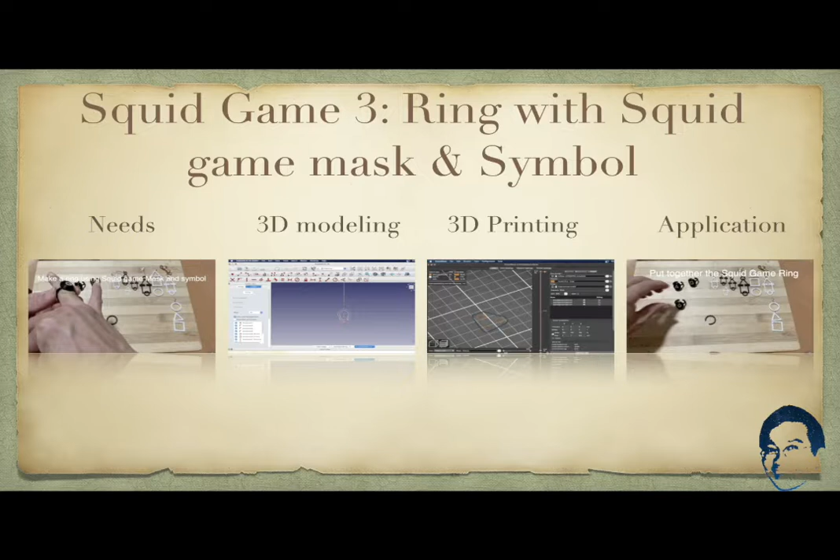In this video, I'm going to show you how you can easily create a wearing ring using the Squid Game mask and symbol. Let's see how the Squid Game ring looks on your fingers.

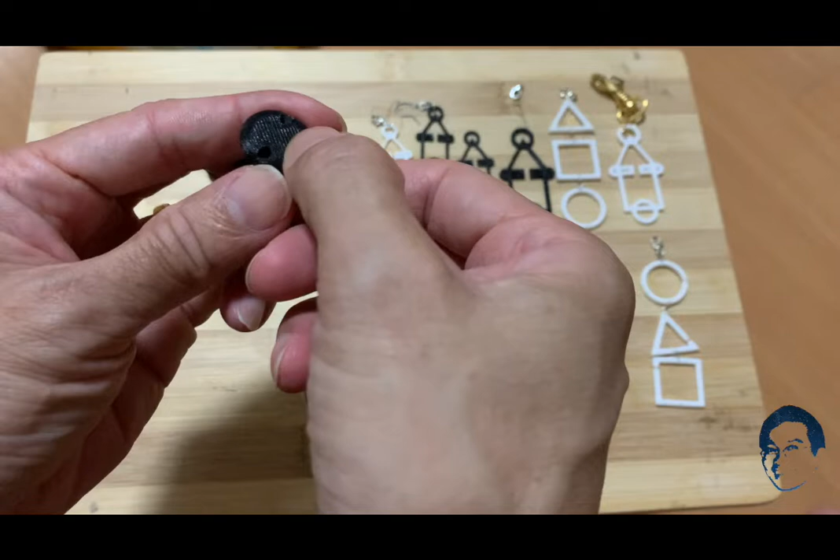These are the printed parts. The 3D printer textured bed has created a very nice texture on it. Behind the mask part are the holes we make for the ring to go through. This is a completed ring with a mask shape ring and the symbol of a circle, square or triangle.

To put the ring and the mask part together, align one end of the ring to the hole behind the mask, insert the ring and turn it around till it is aligned properly. When done, put it onto your finger. It looks nice and unique, right?

If you have a different finger size, you can print the ring with a different size too. For this one, we modeled the ring with a 10 mm radius, taking away the thickness of the ring. The diameter of this ring is about 18 mm.

You may have noticed there are Squid Game accessories here that are different from the rings we have made in this video. They are created in our earlier videos. If you are interested in them, please watch the video. The URL is provided in the description below.

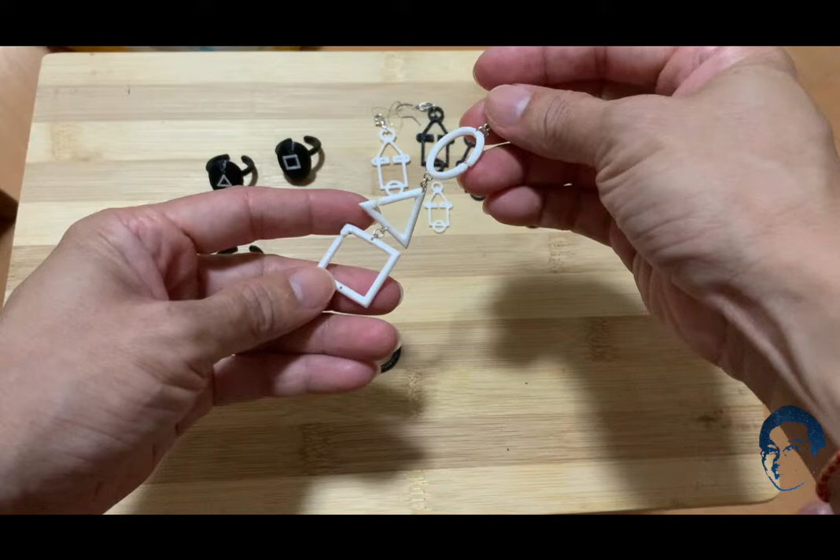This accessory is created in Squid Game Video 1 using the Squid Game symbols triangle, circle and square for earrings and hanging accessory. The other is the Squid Game symbol made in Video 2, which we made into a keychain, earrings and hanging accessory. Alright, which Squid Game mask ring do you like?

Is it the one with the circle, square or triangle? Do you like this mask wearing ring we have made? Do you want to design and make it yourself?

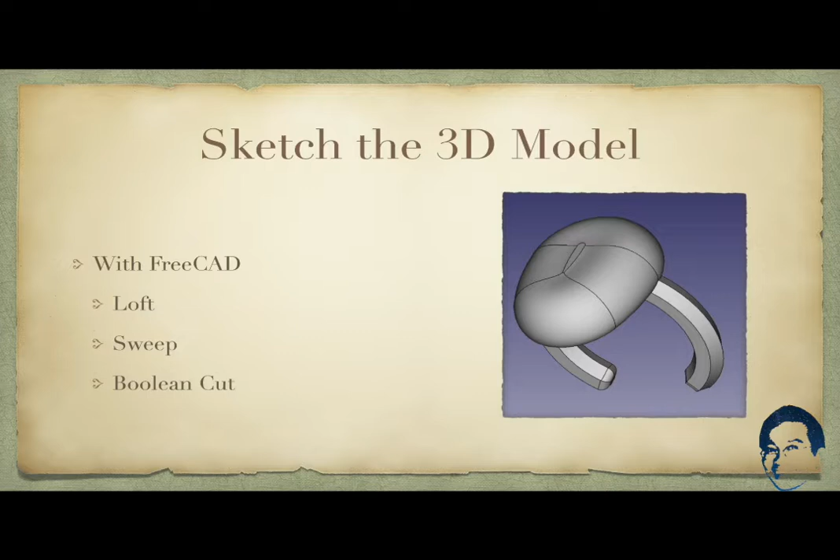Now I'm going to show you how to model the accessory with the FreeCAD software. This is the face mask of the Squid Game mask shape that we are going to create in FreeCAD.

If you do not have a copy of FreeCAD, you can go to freecadweb.org. There are installers for Windows, Mac and Linux. In FreeCAD, start a new document.

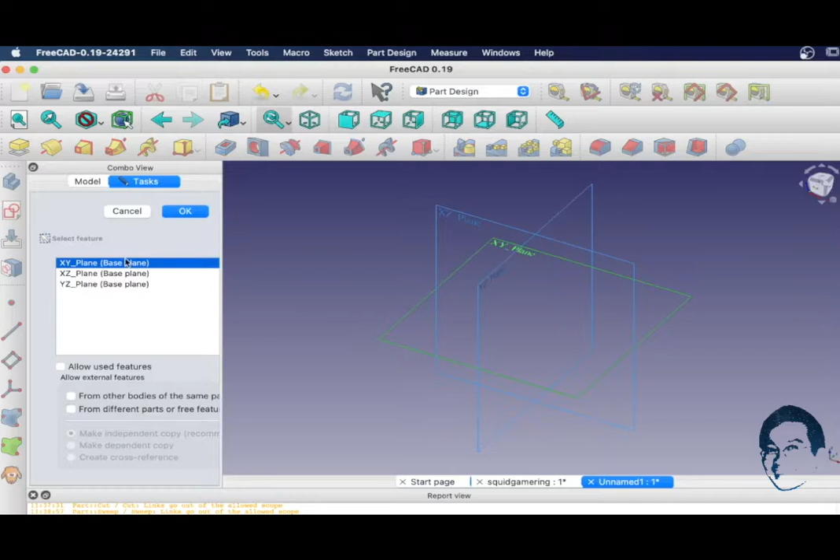In Part Design Workbench, create a new body and a new sketch. In the XY plane, select the arc tool here and we're going to draw an arc here, constrain it to the origin and create an arc, followed by another arc below here, then we constrain to the y-axis.

The radius for the upper arc is 5.5 mm and the lower arc we're going to set the radius to 4.5 mm. We want to make sure that the top is constrained to the axis here, so by clicking the point and the axis, make sure they are constrained to the axis.

The distance between these two arc centers is 5.5 mm and the angle for the lower arc we will set to 130 degrees. We want to make sure the arc is aligned horizontally, so you select these two end points of the arc and set the vertical distance to 0.

Next, we're going to connect the arc on the left side of these 2 points here, constrain it, and the other one, and do it here, and likewise go to the arc on the right here. We will set the radius for the arc to 18.9 and set the right arc equal to the left arc. Alright, this is fully constrained and this is the first face shape we're going to create.

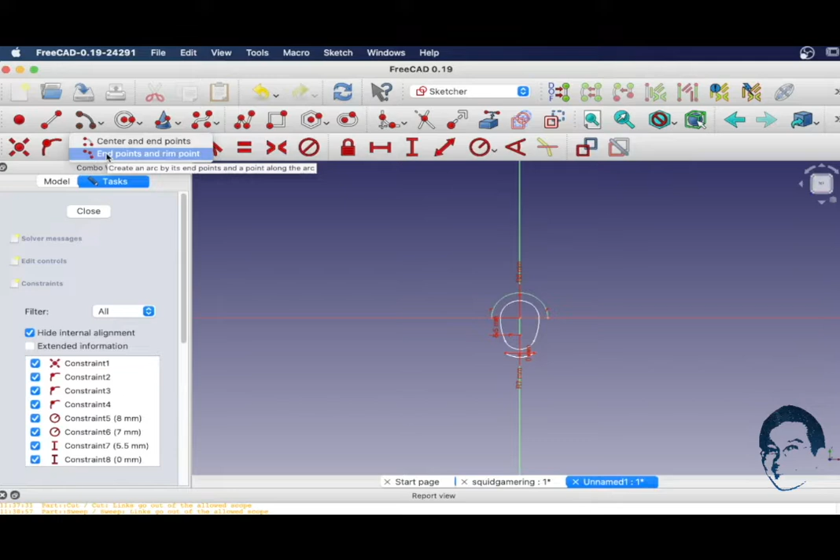Likewise, we will make sure that these 2 points are aligned horizontally by setting the distance to 0. And again, we will use the endpoint arc tool and connect these 2 points on the left here.

Okay, likewise go to the right, connecting the 2 points together, and let's set the angle for the lower arc, which is 130 degrees. Alright, so now we can set the radius for this arc again and set to 18.9, and let's make these two arcs the same, equal. Alright, fully constrained. We are good with that.

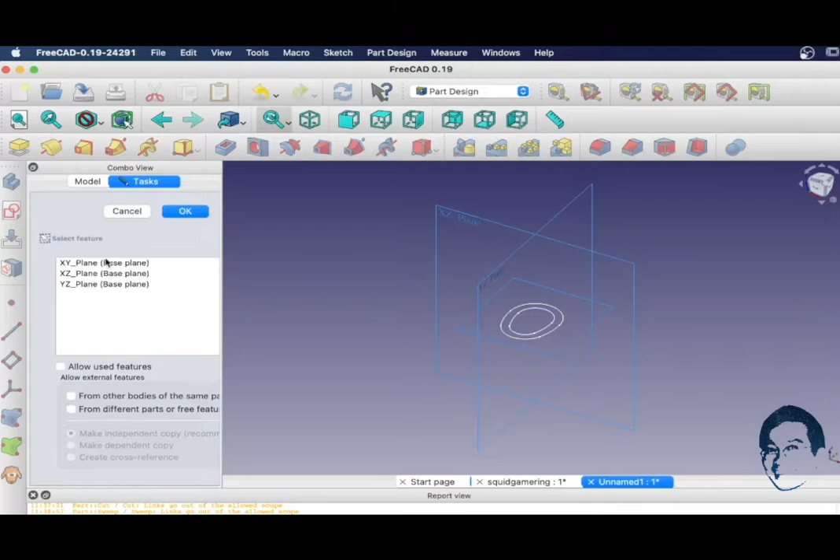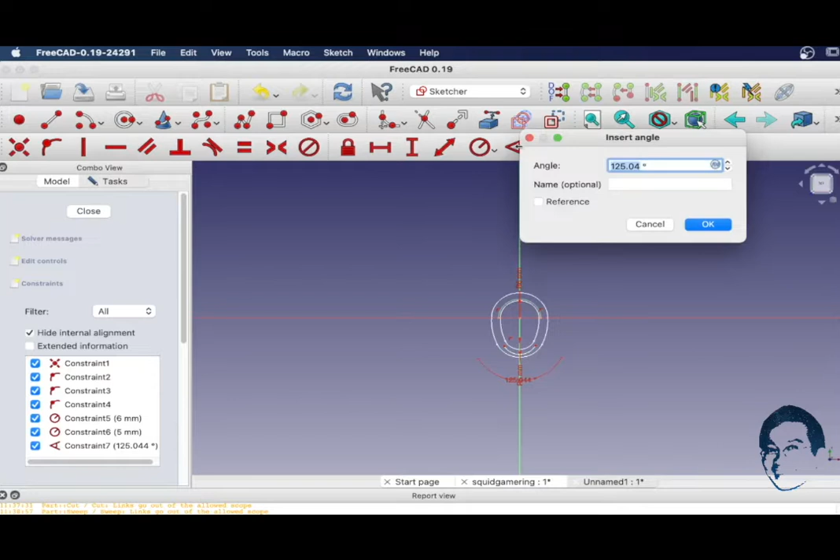Right, let's create another sketch in the XY plane. Draw the same arc again using the center and end point starting from the origin, and we're going to draw an arc here, constrain to the axis. Likewise, another arc below here, and set the radius to 6 and the lower radius to 5. Set the angle to 130 degrees for the lower arc, and make sure that the 2 points for the lower arc is constrained to 0.

And connect the 2 points on the left here together. Likewise, go to the right end point here, constrain it together. Now we'll set this arc radius to 18.9, and again we'll set these two arcs equal, and the last point is to set the distance between the two arc centers to 5.5. Okay, we are good with this.

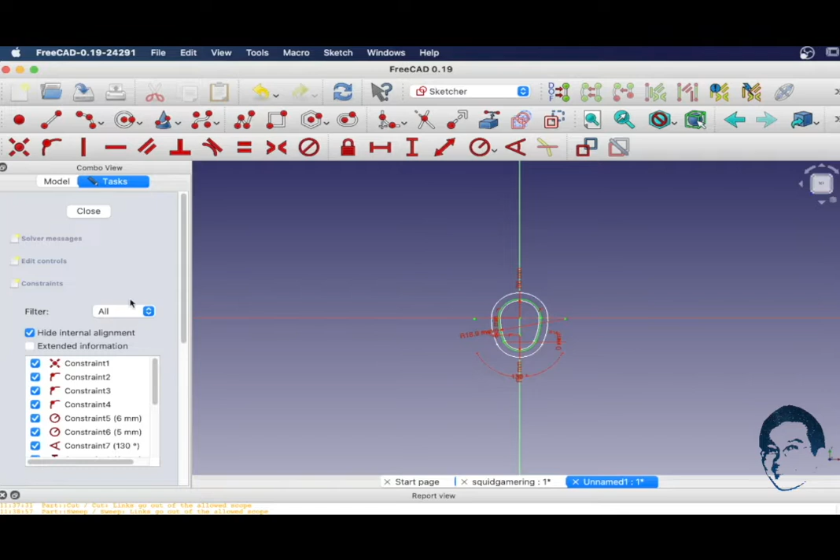Okay, now we have created 3 sketches, but they need to be at different distances on the Z axis. The first sketch, we will move it 2 mm below. So let's go to the attachment here, position. Under the Z, we'll move it -2. So you can see that now the sketch is moved downward.

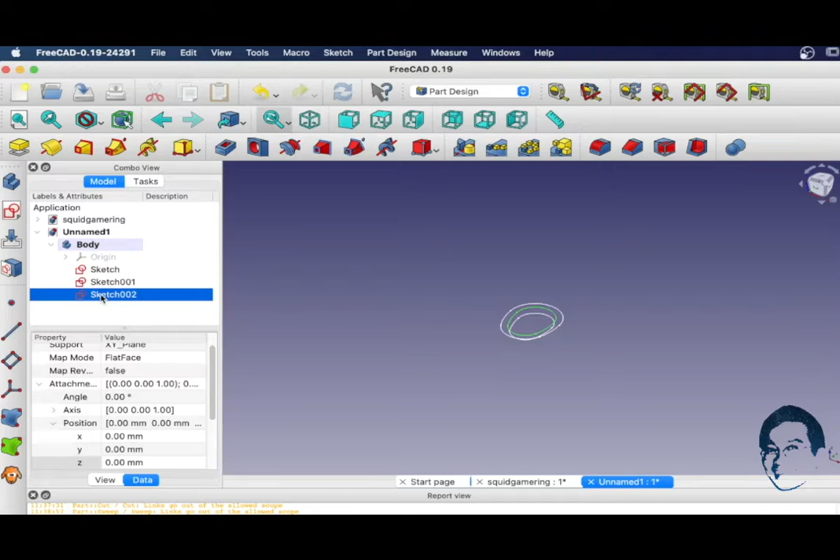For the sketch 001, we'll keep it at the current position. As for sketch 002, we'll move it up by 4.5 mm. Okay, so this is how it looks, on the sketch itself. Right, good. And we need to create 2 more sketches on top of this one.

Alright, let's create a new sketch again, and likewise on the XY plane, we're going to create another sketch using again the arc tools here. Constrain again, and we're going to draw a smaller arc here, and likewise below another arc here. Right, the radius for the upper arc is 2.5 mm. The radius for the lower arc is 1.5 mm. Right, let's zoom out a bit so they can see them.

Let's set the angle for the lower arc first to 130. Then we can set the 2 endpoints of the lower arc to make sure that they are aligned horizontally to 0. And again, use the endpoint arc tools and create the 2 arcs on the left and the right here. The radius for this arc is 18.9. Make both sides the same by selecting them and using the equal tools, and the distance between the 2 arcs here is 5.5.

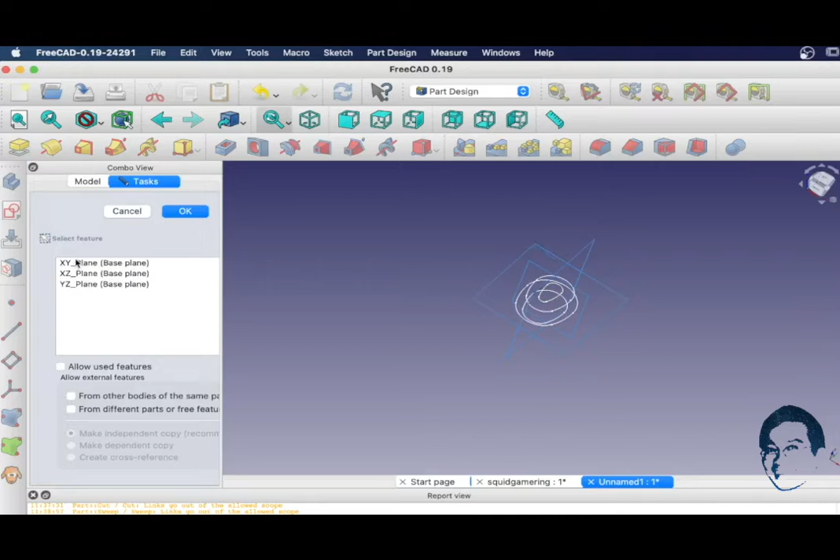Close it, and now for this one, we're going to move this up to 5.1 mm. So you can see on the side here, that's how it looks like. Alright, we're going to create one more sketch. Okay, let's do it. XY plane again. This one, we're going to create a small sketch.

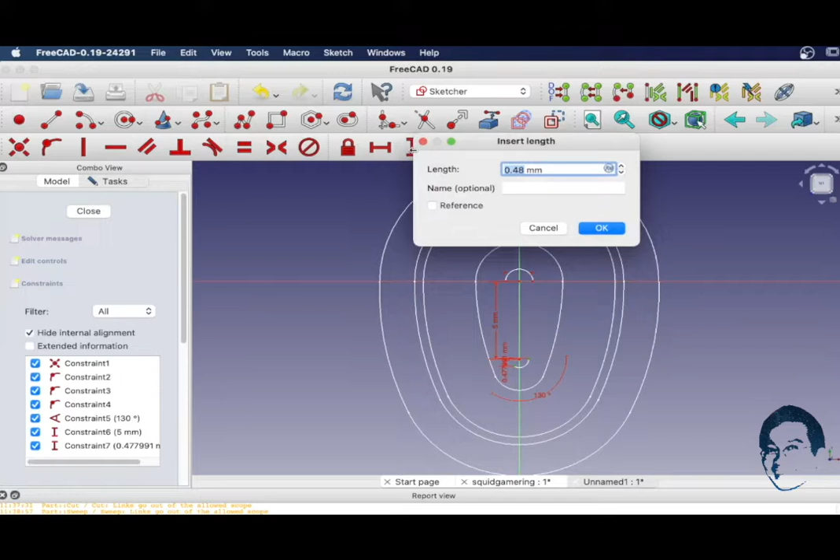Constrain to center, get an arc, constrain, and another arc here, constrain, the angle for the lower arc is 130 degrees. The distance between this lower arc center and the upper arc is 5 mm. Likewise, constrain the lower arc endpoint to 0. Finally, again, use the endpoint arc to draw the side arc. Okay, let's draw it. And the radius for the arc is 18.9.

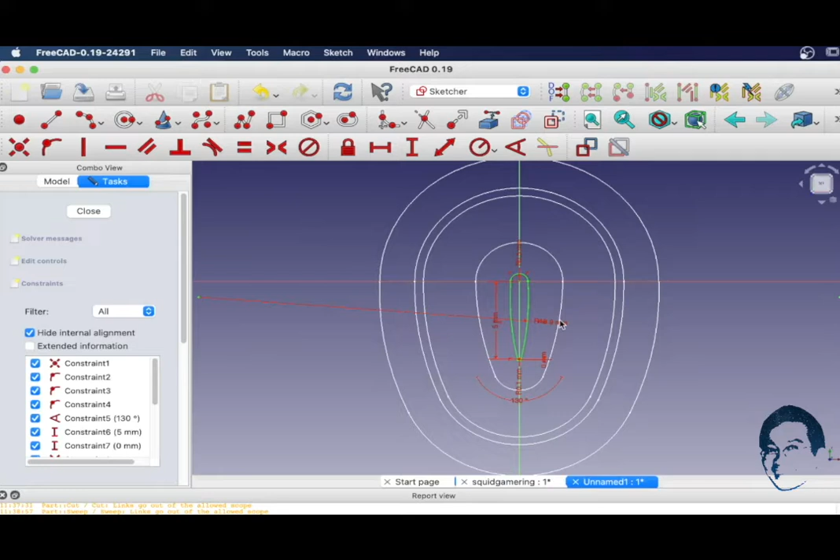Okay, the upper arc radius is 0.5 and the lower arc radius is 0.1. And now I can set both equal. Okay, so this is how it looks. On this sketch, I move it up to 5.15. Okay, so this is how it looks.

Okay, we need to select the first sketches here and create the loft tools, and then we start to add the second layer. Okay, we add this, click on this, followed by this. This is how it looks in terms of the shape that we want to create.

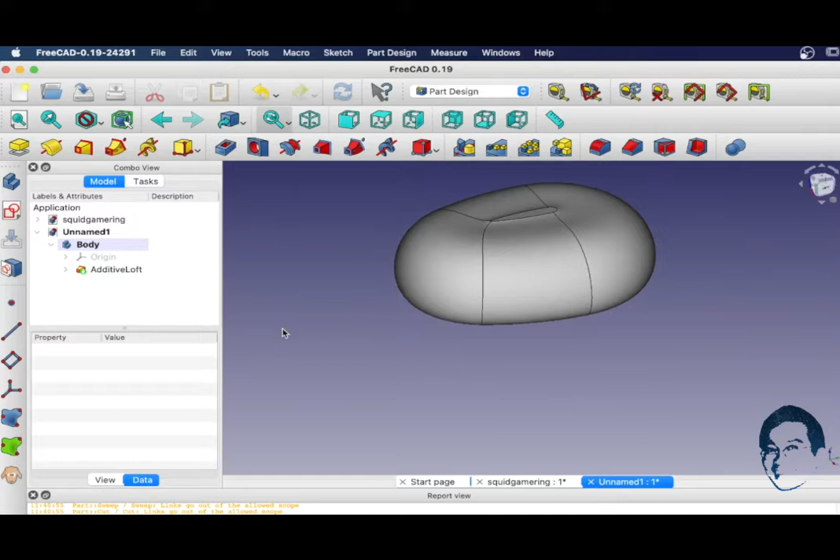Right, so if you now look at the earlier one that we have, we actually create a hole here for the ring to go through. So the next thing we're going to do is add the ring hole for this. Right, for that we're going to create two more sketches.

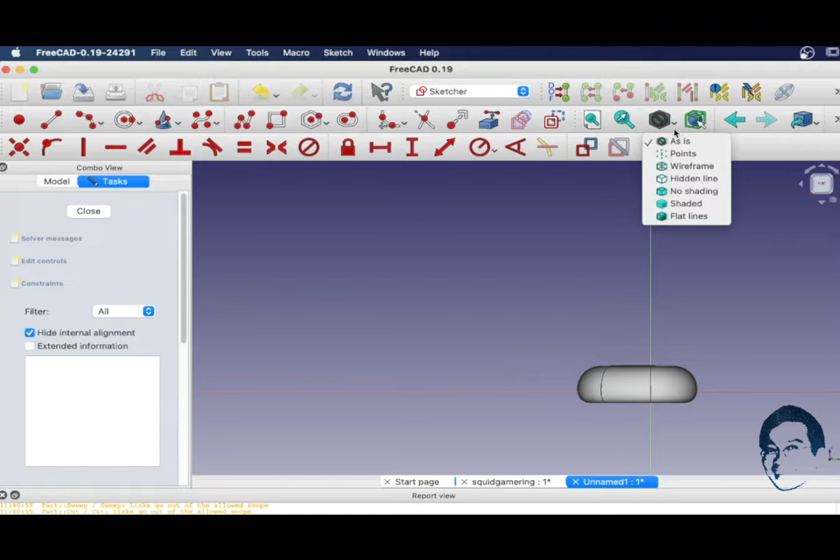Create a sketch on the YZ plane. We're going to draw a hexagon here, and as the object is blocking us, let's change it to wireframe. Use the hexagon tool and draw a hexagon here. Alright, so that's the hexagon we have.

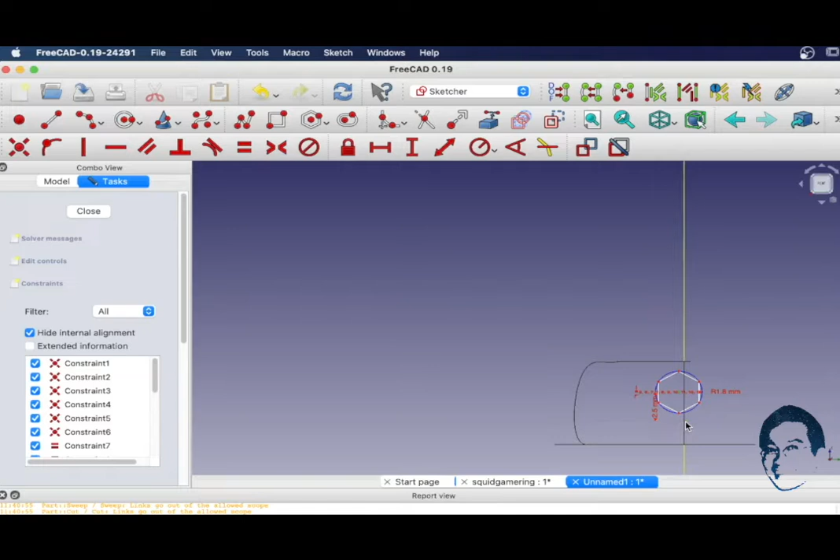Select the line here and set it vertically constrained. The radius we'll set to 1.8 mm. The distance between this and the origin, the vertical distance, is 2.5 mm. We're going to constrain this to the y-axis as well. Let's set the distance to 0. So this is how it looks like.

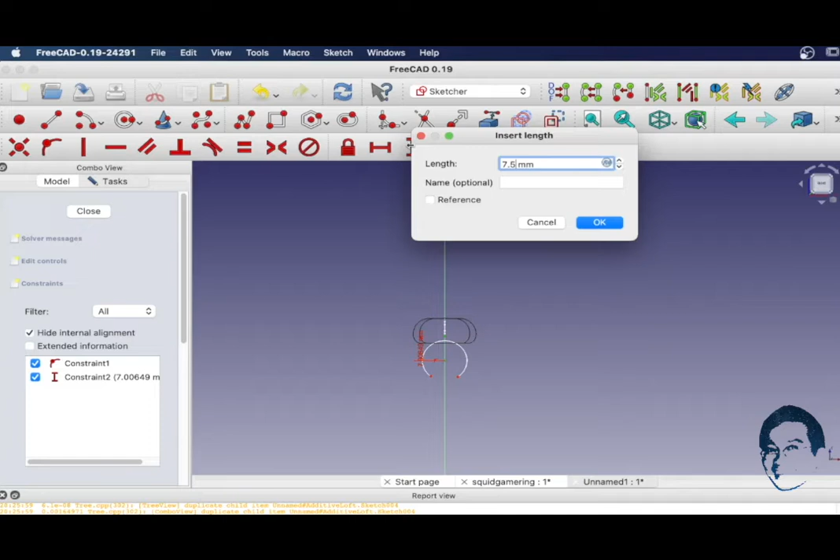Now we're going to create one more sketch for the ring. Create a new sketch on the XZ plane and draw an arc. Constrain the arc center to the y-axis, draw the arc from here to here. The distance between this arc center and the origin, the vertical distance, is 7.5 mm, and the radius for this arc is 10 mm. Basically, this is all we need to do on this arc. Close it, and go back to the view, show it as is.

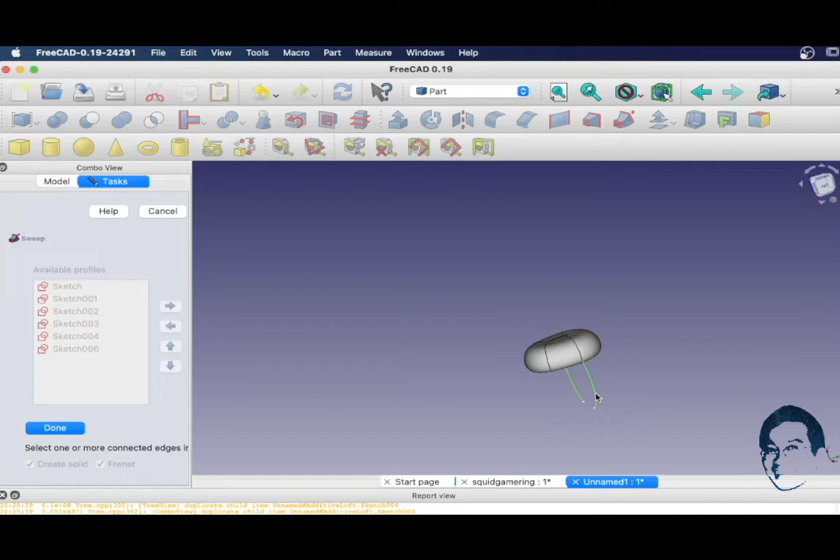Next, switch to the Part workbench. In the Part workbench, select the sweep utility. Select item 005, select create solid and Frenet. We're going to select the sweep path, which is the ring. Done. Okay, so now you can see that I have created a ring around it, right?

And the final thing we need to do on this is a cut between this item and the sweep, followed by a cut. Right, so that's how this thing looks like, and we are done with this.

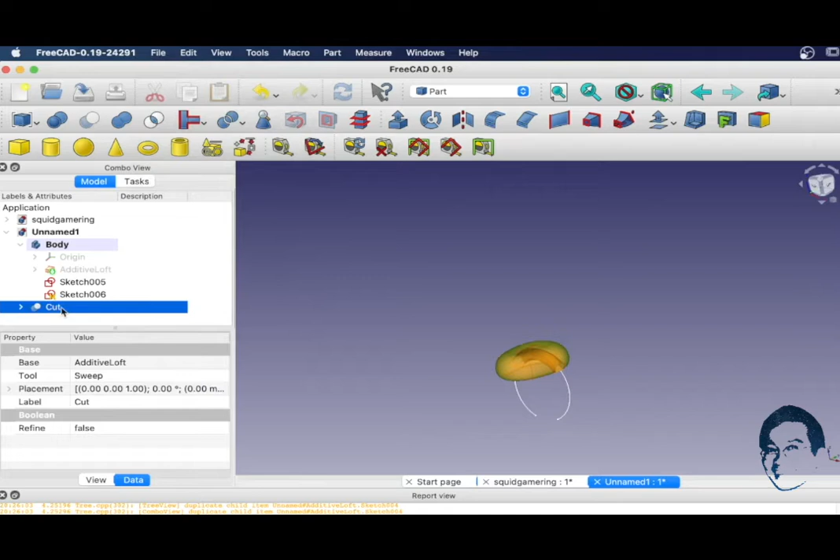And you can save it and export this for your slicers to slice for printing. So from here, select the final object, which is the cut item, export from file, and export it to Squid Game ring. Save it.

Remember, we actually want to put a symbol on the face of the ring here, which is the triangle, square, and circle. We need to create 3 more models here.

Alright, so next is to create a new document. Go back to Part Design, create a new body, a new sketch on the XY plane. Let's create the circle first. Take the circle tool, constrain to the origin, draw 2 circles. The first circle, the radius will be 3.5 mm. The second circle, the radius is 2.5 mm. Fully constrained, we close it.

For the sketch itself, we'll pad it up to 0.3 mm, and that's all we need to do for this. We can export this out by selecting the pad item here and exporting it to Squid Game ring circle.

Export it out. Next, we create another symbol item for the square. Create a new document, new body, new sketch. In the XY plane, take the square tool and draw the square, 2 squares here. The width of the square is 7 mm. Alright, and the width and height are the same, so make them equal.

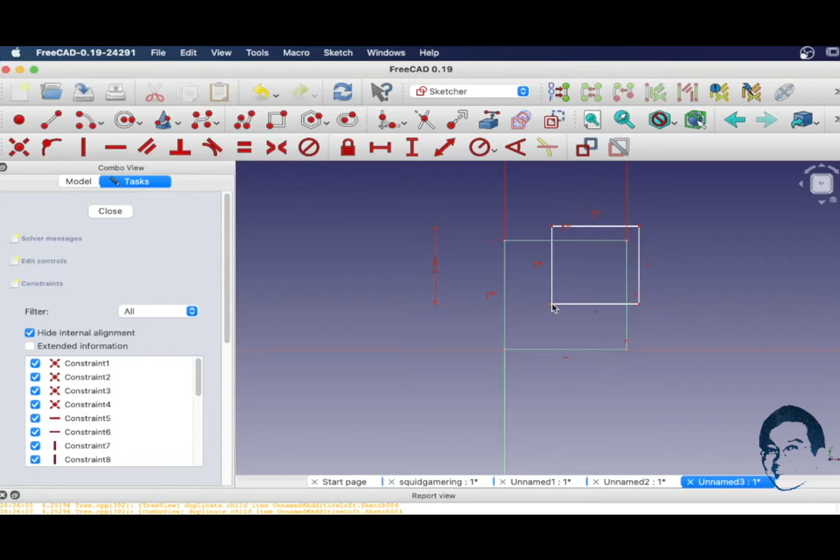Do the same for the other square. The height is 5 mm, and make the height and width the same for the smaller square as well, making them equal. Let's zoom it up. The distance between this and the origin point, the horizontal distance, is 1 mm, and the vertical distance is also 1 mm. Close the sketch.

Likewise for this one, we will pad up to 0.3 mm. Select the final object and export it to Squid Game Square.

Save it. Finally, we need one more document, new body, new sketch on the XY plane, using the line tool. Draw the angled line up, followed by another horizontal line along the axis, then another angled line up. So this is not constrained, as you can see. Make sure that they are constrained together.

The length of the side of the triangle is 7 mm. We make all the sides the same by selecting them and making them equal. To move this, select this and constrain them.

Now draw the inner triangle. Draw the angled line down, followed by another horizontal line along the axis, then another angled line up. The distance between these 2 points is 1 mm. The side distance is 5 mm. Okay, so this is how it looks like.

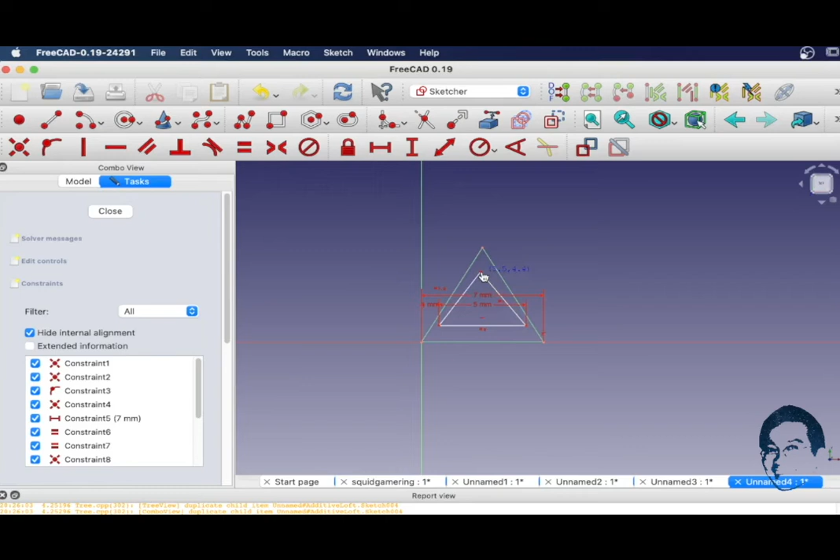And let's make all the sides of the triangle the same. And we expect the vertical distance here is 0.5, and we are good with that. Okay, and with that again we pad it up to 0.3 mm, and the final object we export it out to Squid Game ring triangle.

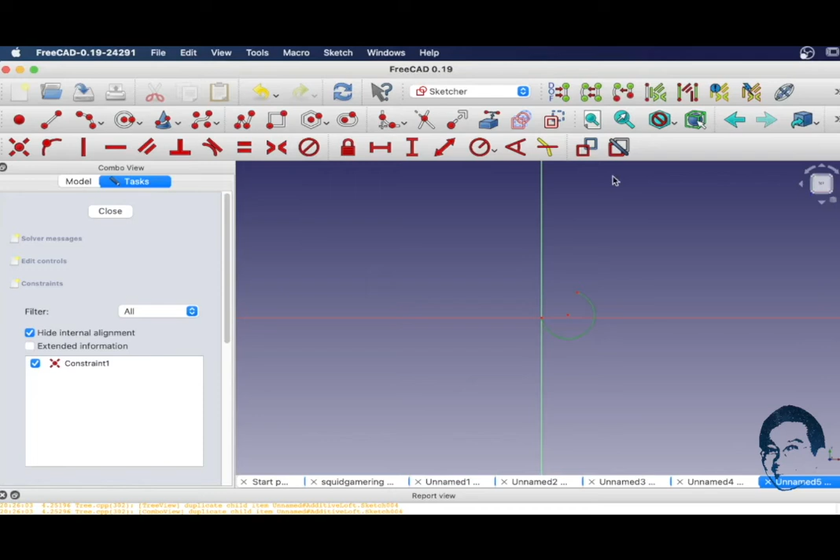Next, create a ring part for the finger. Create a new document, new body, new sketch. Right, so on the XY plane, use the endpoint arc to constrain to the origin and draw an arc around it. The radius for this arc, we're going to set it to 10 mm. The distance between these two endpoints of the arc here, let's set it to 6 mm.

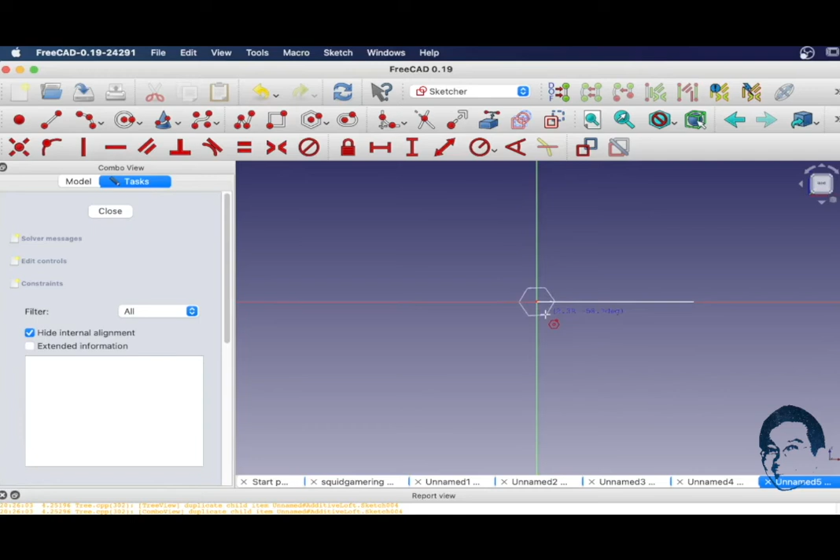Make sure that it's aligned to the axis here. Alright, so that's constrained to the axis to make it fully constrained. Good with that. Next, we need to create the thickness of the ring. Create a new sketch, XZ plane. Going to add a hexagon to this, constrain to the center here, add a hexagon. Make sure that the horizontal line here is horizontally constrained, and the radius for the hexagon is 1.5 mm. Good with that.

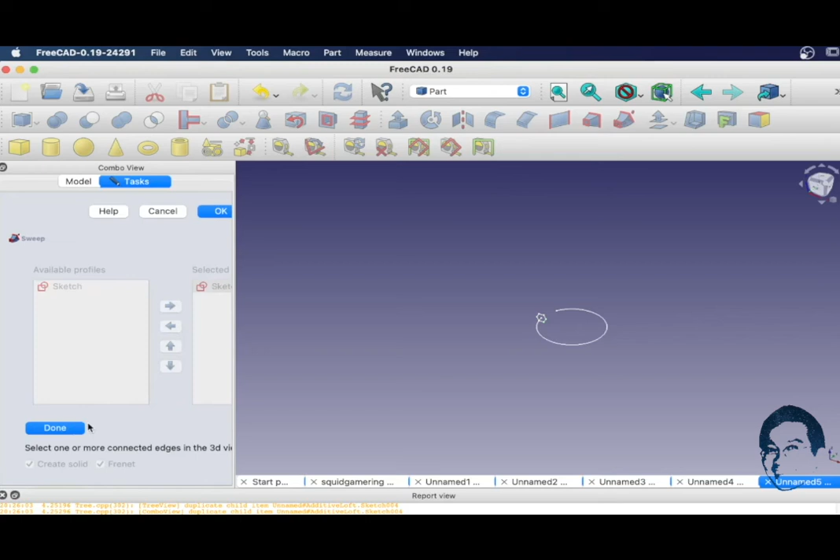Alright, with that we switch to Part Workbench, and in the Part Workbench use the Sweep utility. Select Hex Sketch as a profile, create a solid Frenet sweep path. Select the sweep path here. Done. Okay. So this is what we have created, which is a ring. Select the edges and give it a fillet of 1.2 mm, and move over to this side. Select all the edges of the hex endpoint here. Give it a fillet of 1.2 mm.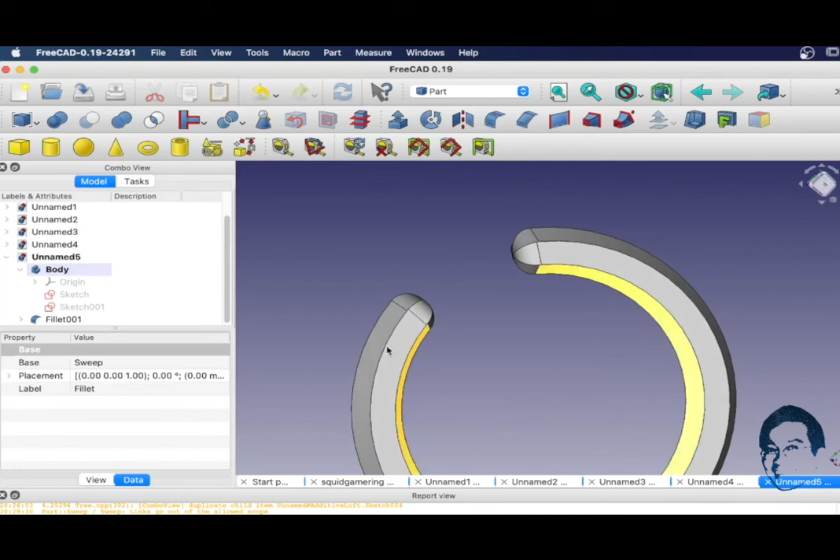Alright, that's all you need to do for this one. And with this done, you can now export it. We'll call this Squid Game ring 10 mm. That's all you need to do for all the sketches for this ring, and we can now switch over to the slicer software to slice them.

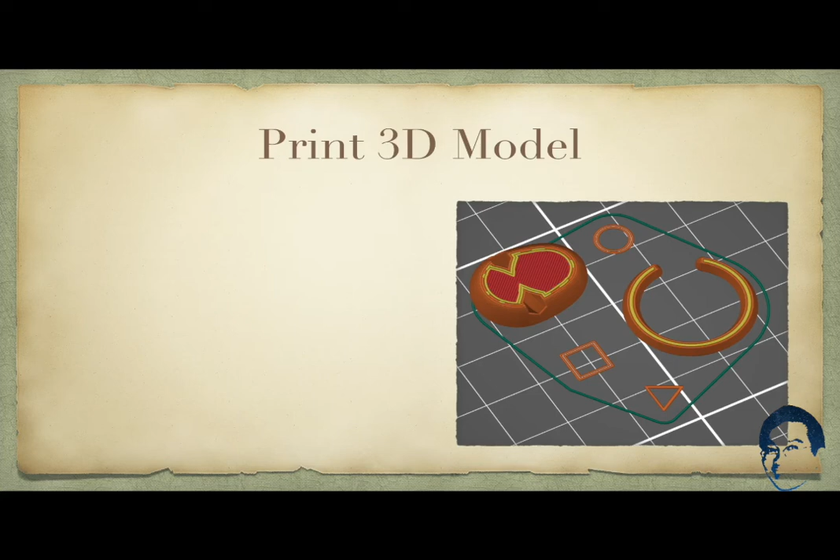With the 3D model done and exported to STL format, we are now ready to import the STL into the 3D printer slicer software. In the slicer software, click on Add, select Squid Game ring STL and the ring 10 mm STL. Open them, rearrange them. We will need to rotate this 180 degrees. Select this item, okay, in the rotation change it to 180 degrees.

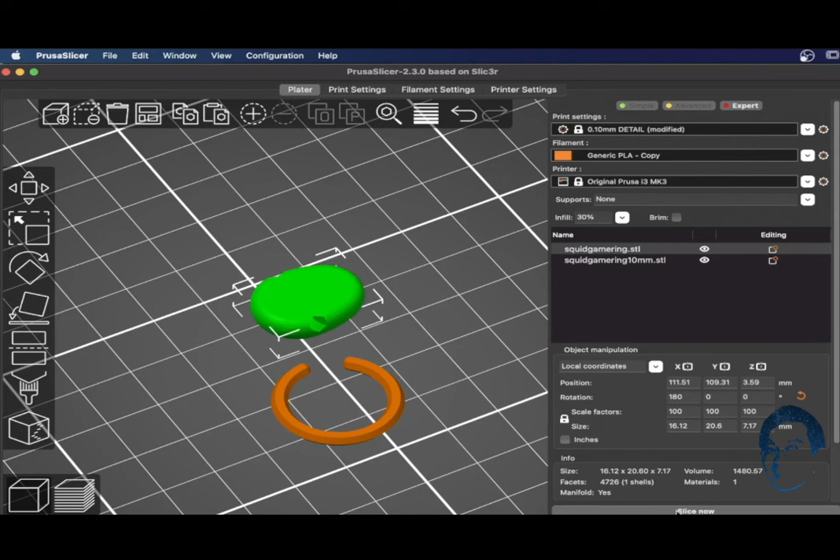Okay, for this we're going to print 0.1 mm details. This is going to print in PLA. Infill at 30%. Basically that's all we need. If you're happy, click on slice now. With the model sliced, you can drag the orange bar here to see how each layer is being sliced. Right, we are good with that, and you can scroll down on the right panel to see that it will take about 0.6 meter of filament to print, and it will take about 25 minutes to print this one.

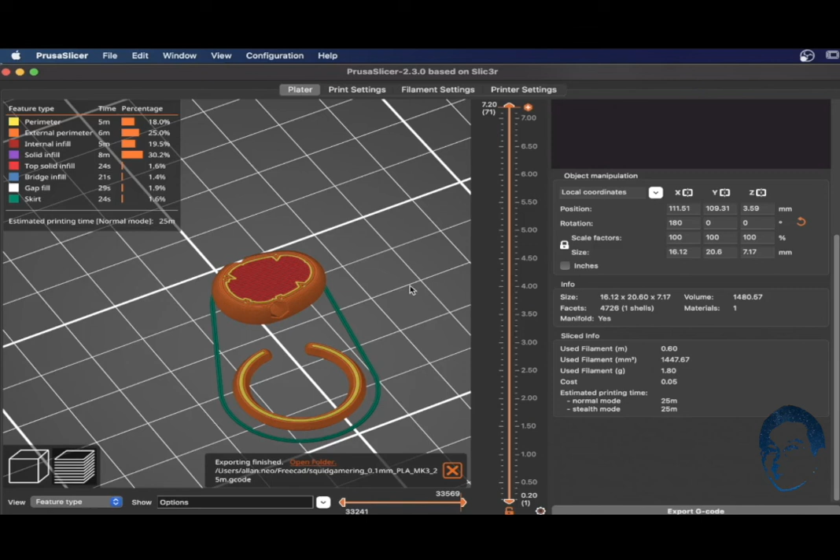Good with that, click on export G-code. You can take the default name given or input your own name for the G-code file. When the G-code file is exported completely, this pop-up message will show you that it's done. Okay, so this is what you need to do for the ring model slicing. Next, we need to slice the Squid Game symbol.

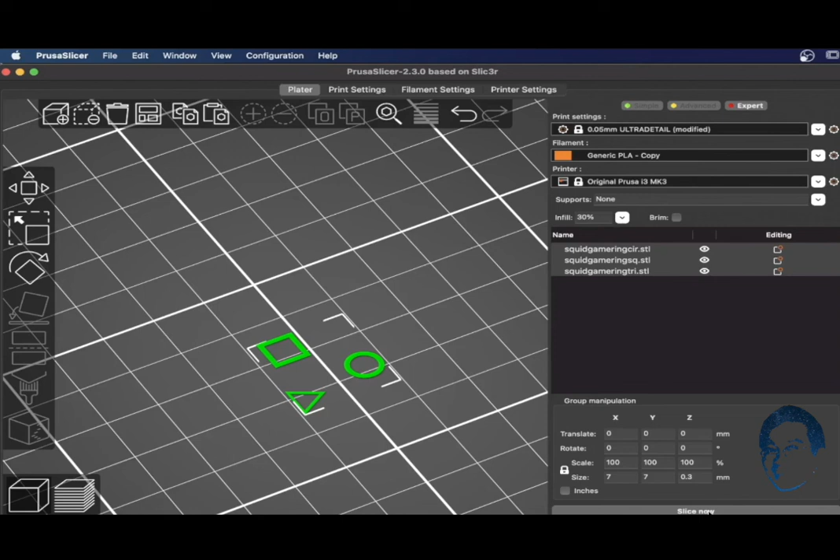Delete existing model and add Squid Game ring circle, square and triangle STL. Open them. When they are imported, click on arrange. We're going to print these in much more detail, which is 0.05 ultra details. Okay, and the rest we leave as it is with PLA, infill of 30%. All good. Slice the model. This one is very thin, so it's only 3 layers, as you can see here, right? Everything is good.

We just need to click on export G-code. You can take the default name for this one or input your own name, okay, and save it. Alright, by the way, this one will take less than a minute to print, and it only requires about 10 mm of the filament, and this one we will need to print in white color.